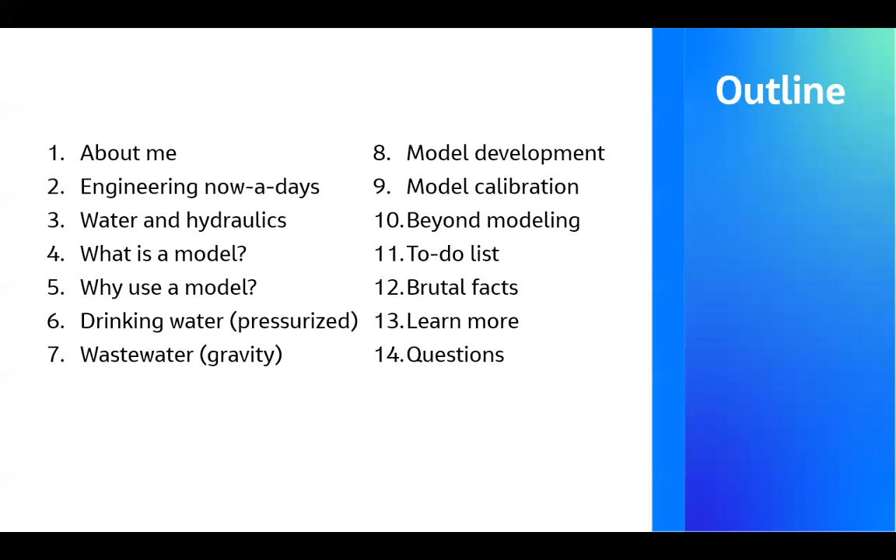Beyond modeling, some to-do list for you. You would want to develop yourself in hydraulics or even in some sub-realm of civil engineering. Some brutal facts about the consulting work, not to discourage you. As I said, we're always looking. Just some points to consider if you would like to apply to consulting work in the engineering profession, how you can learn more, some more resources for you, and hopefully we can have some time for questions.

So I'll do this. By training, I'm a civil engineer. Everybody's in civil engineering here, right? Yeah, yeah.

Good. From University of Tehran, where I was born and raised, and I worked for a few years. Then I moved to Canada in 2013. Before that, I did the master's from the same university. You can see the topic, energy assessment of pumping stations, how they should run throughout the day into a distribution system that brings drinking water from the treatment plant to the houses where we live. And then I looked at energy again between 2013 and 2018 at Queen's University.

It's not that bad, but I looked at energy efficiency, but not at the pump stations. I looked at each and every single pipe because that's where the energy is lost. And for that matter, I had to use a lot of statistical analysis. Well, that's my PhD. I looked at that. It's quite fun.

Then I became a professional engineer because toward the end of my PhD, I was working full-time in Toronto and part-time writing. Yes, that's a possibility, PhD students, if you're thinking about it. There's not only one way of living. You don't have to work full-time. If you're kind of through with your PhD, which was the case for me, I was lucky. I got the permission from my supervisor and I moved to Toronto, worked full-time, and part-time wrote my thesis. Getting a PhD, getting some professional experience. So right after one year, I got my P.Eng. with Professional Engineers Ontario.

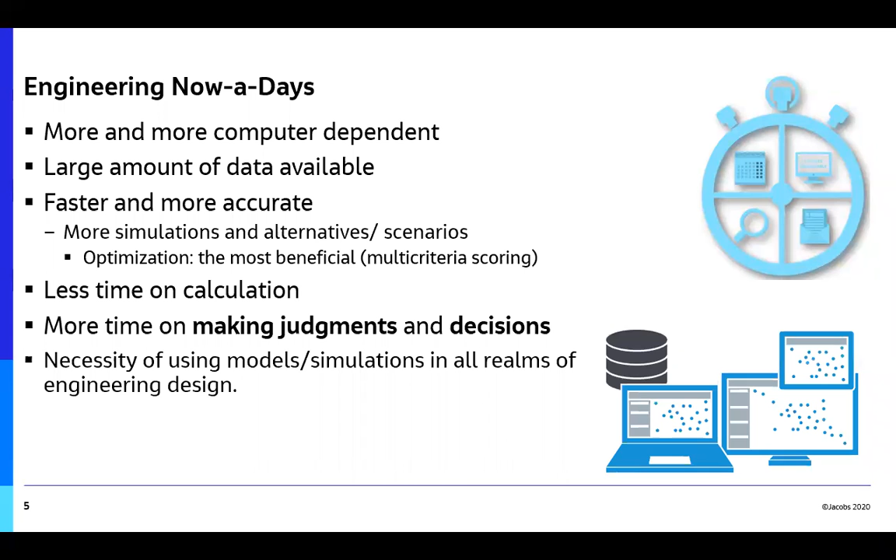So I think I already covered all the bullet points that I have in here. So today, water and hydraulics, a small part of civil engineering, as a big team, we're together looking at different realms of civil engineering. One is water. Under that, there's hydraulics, there's hydrology, and I'm not saying that the list is exhaustive here.

There are a lot of different niches that you're working on, and you might think my research topic isn't really included here. And you're right, because I'm just going to focus on hydraulics of conduits, not rivers and hydraulic structures. We use pipes between the water treatment plant and the houses to bring drinking water to the houses, and also pipes between the houses and the wastewater treatment plant that collect the sewage. So we're going to talk about those.

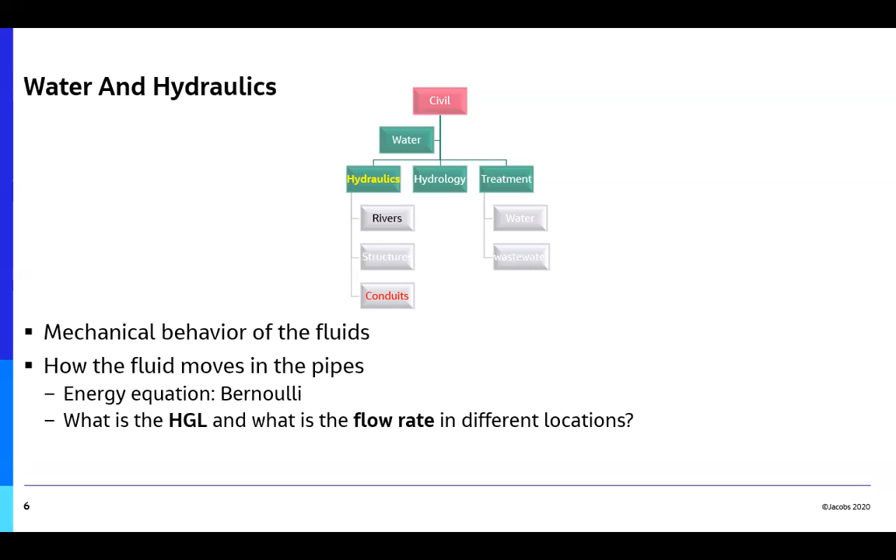Hydraulics is definitely way broader. When it comes to conduits, we're mainly interested to know the regime of the flow, or how the flow is changing in terms of flow rate, what is the HGL. These are the most important things. And in pressurized systems, it's likely different from gravity flows. Keep that in mind, and we're going to talk about it a little more.

As I want to just cover the basics, we all know what models are. Models could be like prototypes that we use in a lab, or the kind of model that I'm talking about would be virtual, in a computer.

Let's say if I did 2 theses in water distribution systems, I really didn't mess around with the real distributions. I didn't go out, dig out the asphalt and dig into a pipe to break it, to do tests on it to see how the energy is changing. Instead I used a model of the distribution system of, for example, the city of London, the city of Kingston, Ontario, or Columbus, Ohio, as I really worked. So have that in mind.

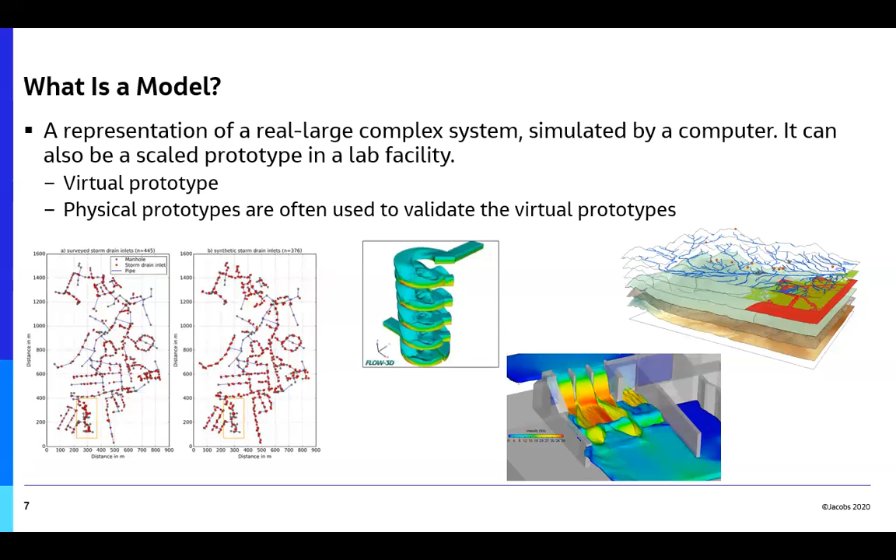And those models would represent the reality that we're trying to get to know how it would behave. I trust that every day you're modeling a bridge, a structure, a foundation of something, or a pipe, or whatever, your riverbed, like the little flume that you're modeling in the lab. We're always using models, and we want to look at what happens if.

That's why we use models. Basically, we want to say, we're not going to wait in the city of London 25 years and see what happens in 25 years when the population has grown to double.

We're going to look at the model. We're going to take the existing model of, for example, the distribution system of the city of London, and put the population of 25 years from now on it to run and see what kind of catastrophe we're looking at, so that we'll be ready in 25 years.

That's how we've always operated these systems. We look at what happens where there's a fire. Are we able to fight that fire? Is the distribution system able to fight it? What if there's going to be a lot of rain tomorrow? Are we going to get some sort of flood somewhere?

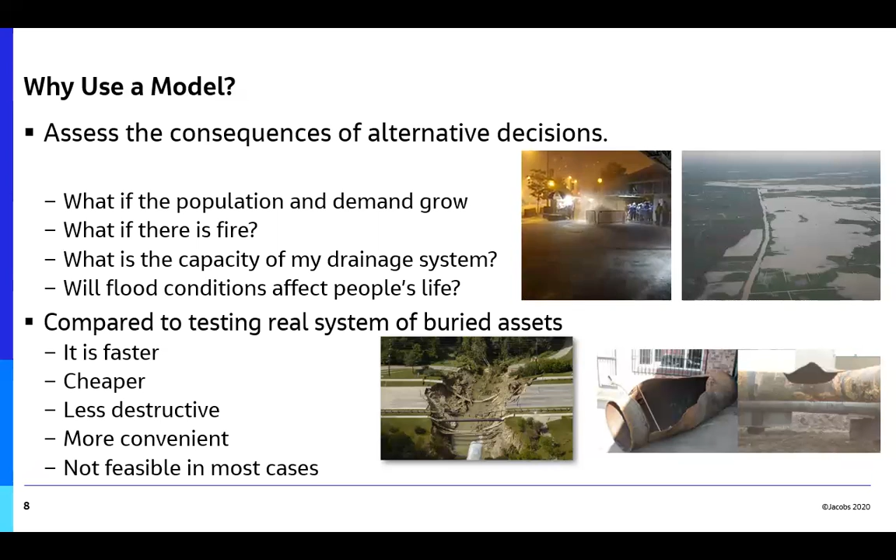Okay, so pressurized hydraulics - I'm going over the basics. It is interesting because sometimes graduates, even from major universities, come out and don't quite know the difference between gravity and pressurized hydraulics. That's fine, and that's why I talk about it for a minute.

So what happens is the HGL, hydraulic grade line, in a pressurized system - it's quite nice because when you're walking out on the street, say tomorrow or in two days we go for a walk, you're walking along the sidewalk. First of all, you've got to know that under the asphalt there are a lot of pipes. Some of them are bringing water to our houses.

Some of them are handling sewage or stormwater, gas pipelines, a lot of different things. We're talking about water and wastewater today. It's interesting for water - the HGL, you don't see it, but it's above your head. Why? It's out in the sky, usually two, three, four floors above your head, because these systems are pressurized.

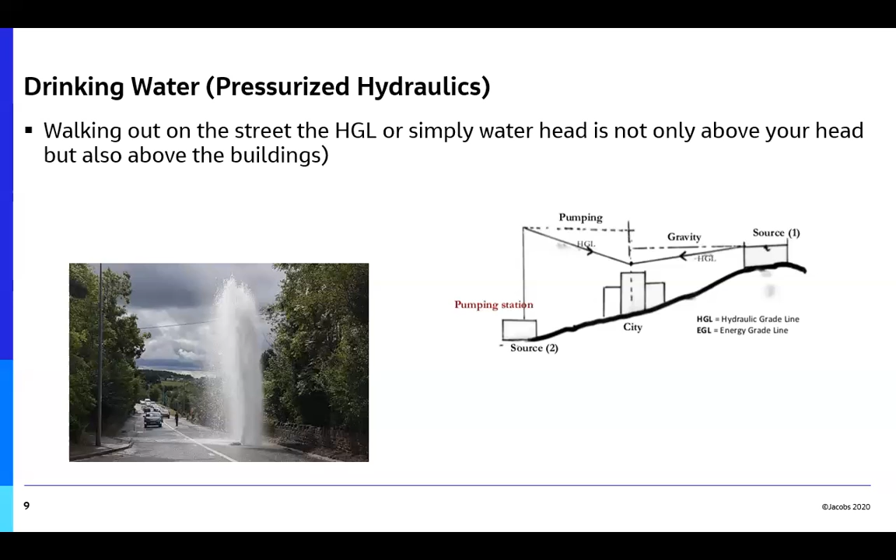When you open the water tap, the water needs to get out of the tap. So sometimes when there is a break in the pipe, if it surfaces at all, you can see how high it could go. So what is the difference? Okay, I was getting ahead of myself.

WaterGEMS by Bentley - some of these you have to pay for the license. As students, it's hard to get your hands on, and that's totally understandable. There are two ways. There's a surrogate software I'm going to talk about, EPANET. I wrote two theses with that

dinky software package. But there are sometimes opportunities through university - you can get a student license or something if there's enough of you asking for it. And I'm not saying if you don't have the experience we're not going to hire you at all, but it's going to give you an edge over people who don't know this software. If you're interested in something, at least you can try it, or watch some videos about WaterGEMS.

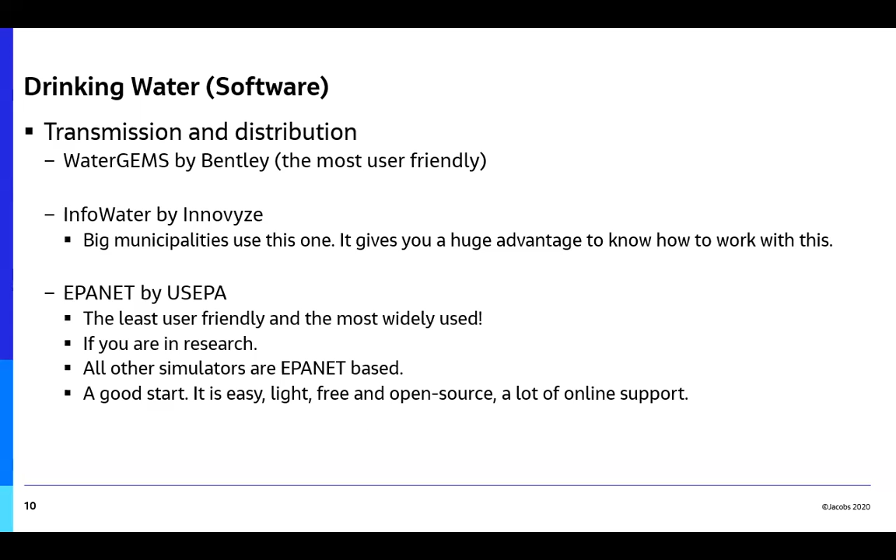And once you've familiarized yourself with those software packages, there is one more pressurized phenomenon you can look at. Have you ever heard of transients or water hammer? Maybe some of you are working on it as a research topic. Some people work on it. When there's a sudden change in a pressurized system, the system goes crazy.

It goes crazy, like ups and downs in the pressure. I'm going to explain it like this. There's a steady flow, like a normal regime of flow in a pipeline with a valve on it, going from left to right. And then I'm bored and I just shut the valve off. Sudden change in the system.

It happens - nobody does it on purpose, but sometimes in huge facilities like a pump station, or the operator - now these big facilities are all computers and sensors - sometimes things go wrong. The valve's closed, the water that a second ago was going from left to right is stuck. Think of a train as an example - it's just getting stuck. It just wants to keep going.

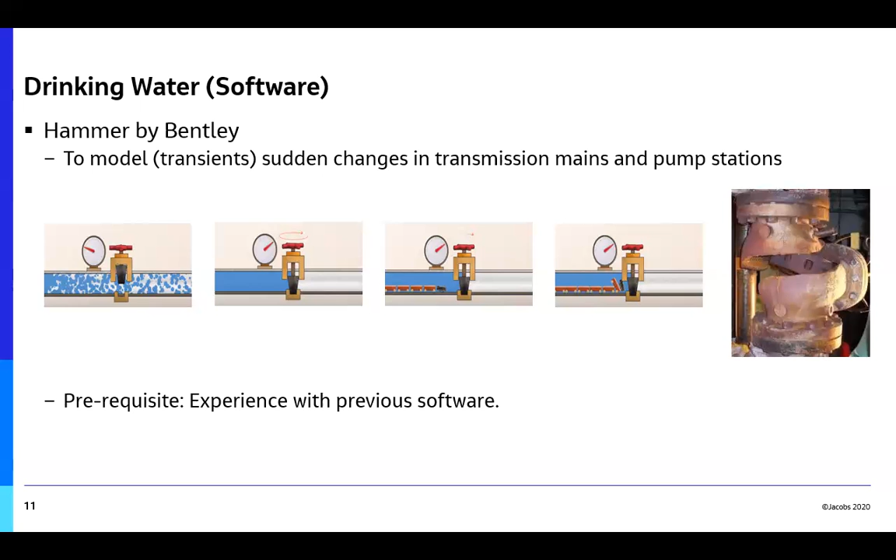So this is one of the coolest things you can do in pressurized systems. And once you do it a few times, you'll see it's not really rocket science, but it's a very sought after skill. So Hammer, which is the name of the software, is something you'd want to look at - by the software Bentley - but you want to have some previous experience in pressurized systems a little bit, and then you can probably experiment with transients.

By the way, transients is the way we engineers say it. If you open the dictionary, it's transient. But if you say that as engineers in the office, they're not going to... it's like two syllables, transient, which means a transitory state, something just like we started talking about. We say transients. Engineers are not necessarily very good at pronunciations.

But that's gravity flows. Unlike pressurized water systems, gravity flows - when you're out for a walk, you want to go for a walk today, I'm fine with it. Again, underneath there are sewer pipes. The wastewater, stormwater flowing through them. But the HGL is now underneath the asphalt, below your feet, because they're not pressurized. Those systems work by gravity. When the start of the pipe is higher, the end of the pipe is lower - that's how water travels.

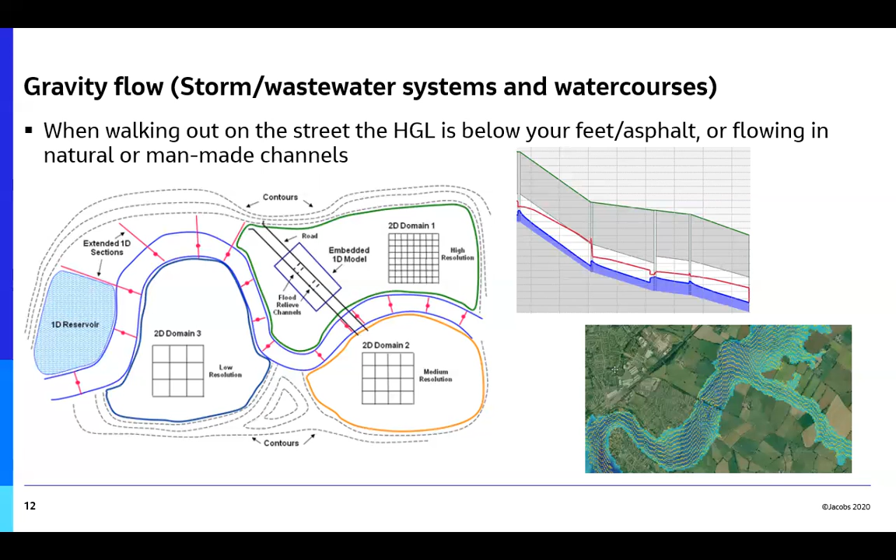Okay, software packages. Again, if you don't like my stories, you'll have access to the slides afterwards. I'll share with Professor Lee, and you can ask for those. InfoWorks by Innovyze, again, for big municipalities. If you know that, you're golden.

SWMM by US EPA, just like EPANET, is open source, used in academia. Try it now, it's just a few megabytes, you can experiment with it. That's your gateway. PC SWMM by CHI, used recently for medium-sized municipalities. SewerGEMS is just like the counterpart of WaterGEMS, CAD based.

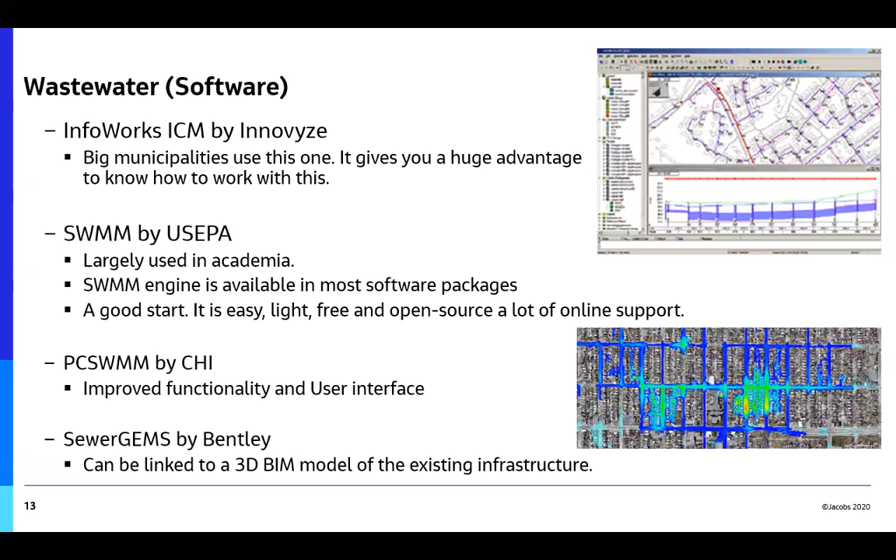How we develop models: we don't sit down and put all the elements together ourselves. Usually if there's not a model, a small municipality that wants to develop a model for the first time has a GIS system, they've put all their assets in GIS. So it stands to reason for you to get familiarized with ArcGIS or anything like that. If you can manage, I'm pretty sure you'll have access through university.

Once the elements are put together, the hydraulic loads are usually communicated to you through Excel spreadsheets from historical data, or every system is monitored through SCADA. What is SCADA? Supervisory Control and Data Acquisition. These pump stations, these big assets, are always being monitored, the flow going through them, the pressure they're putting into the system. That data is used, so we get it and put it into the model. Elements from GIS, loads from SCADA, or any sort of historical billing records - the model is shaped up.

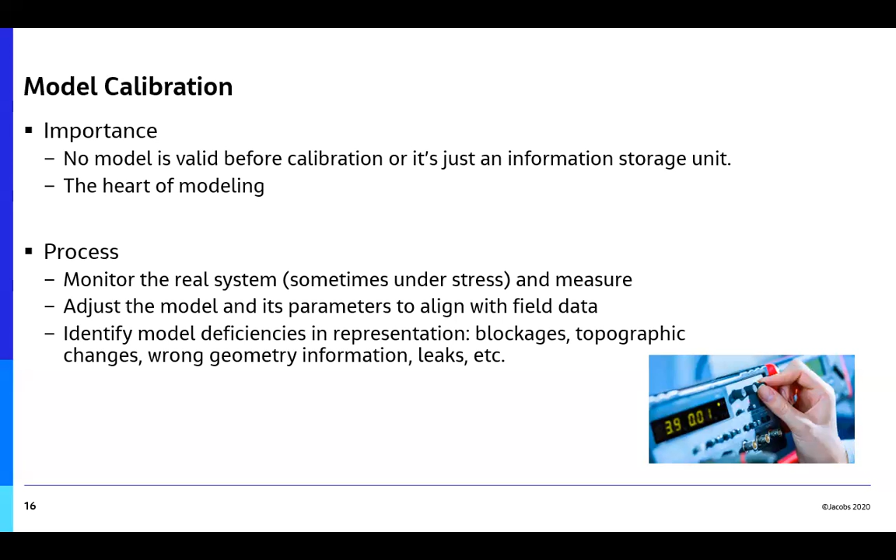And then, once the model is built, I'm afraid I have to say it's just a storage unit of information if you don't calibrate it, because there's no reason it has to show the exact behavior of the real system that's out there in the real world. What am I going to do then? We're going to monitor the system, and the process is monitoring the system and tweaking some parameters in the model to minimize the difference between the model and the field data. That is very crucial - that is called data or model calibration.

What's required? You go out in the field, some strategic locations, and you monitor the flows and pressures, then compare to the model - I'm not going to go through that, but that field data is very important. The quality of the data matters, because you're going to calibrate your model to the data. If your data is not of high quality, your model is supposed to represent reality, but it's not going to be of high quality.

It's a very sad fact, or it's reality, but it happens all the time - we're always limited because of some problem with the contractor, some mistake they made out on site when they were collecting their data. The calibration procedure will be compromised.

And usually when you're collecting your field data, here's the catch: you start monitoring. If it's a pressurized system like a distribution system, or a gravity system like a sanitary system, you start monitoring the flows or pressures. You scatter your monitors around the system and then you shock the system. In a water distribution system, what we do is open up the fire hydrants you've seen, and that creates a little shock, a pressure drop, and the monitors are monitoring the effect of that pressure drop. That's what you want during calibration.

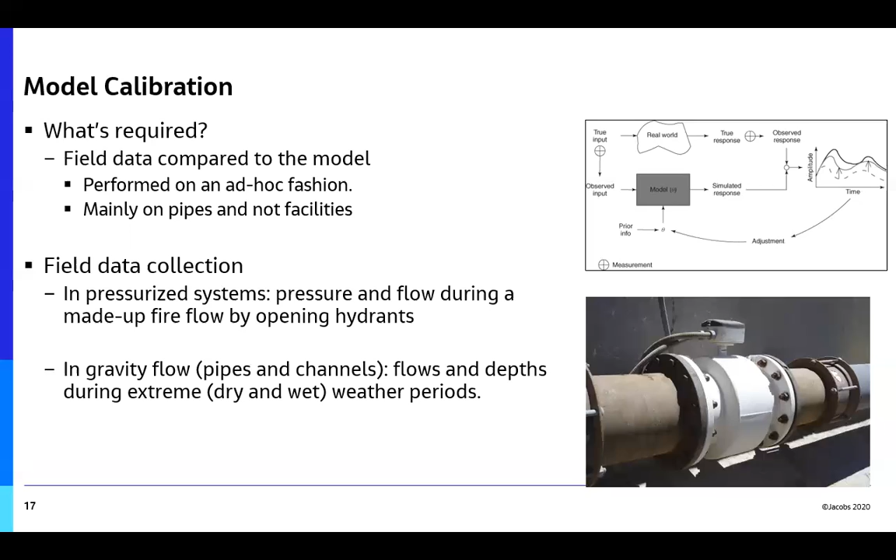Once you've done that - calibration is the heart of modeling to me. You usually start with smaller assignments; you don't delve into calibration right away because it could be overwhelming. But once you've calibrated a few models, great job, because you're perfecting your understanding of hydraulic modeling. And it's not just about hydraulics - any sort of model you're given, for structural analysis or geotechnical analysis, the same principle applies.

It's a good question to ask how this is actually representing the real system we're trying to figure out the behavior. There's a video of me talking about a real project we calibrated a year ago, sanitary work for the city of Clarence Rockland. It's one where we used optimization for calibration and machine learning. Quite interesting results.

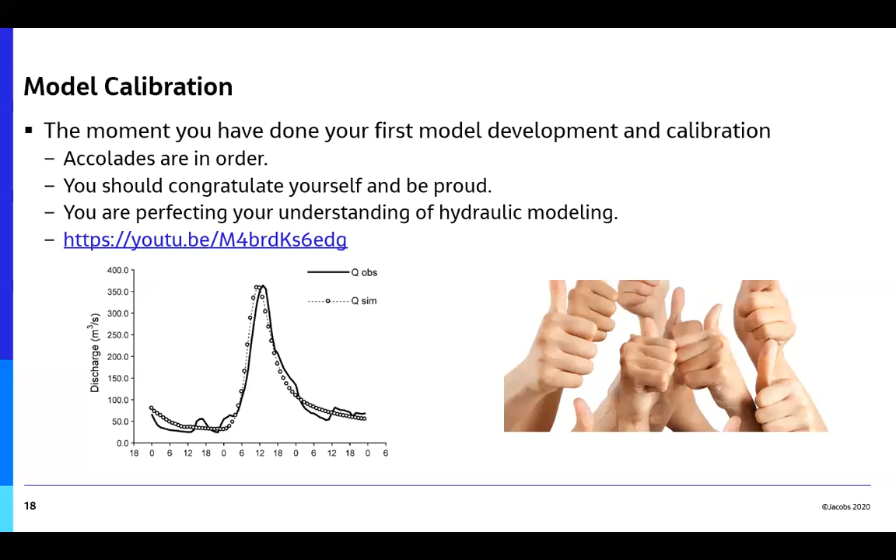I gave a lecture here almost a year ago for the teams, if you want to take a look at it. This is the simulated results, and this is the observed. You try to minimize the gap between those two, and that's how we get the models calibrated. You can never have a perfectly 100% calibrated model.

Sometimes we say this model is calibrated only for a 5-year rain event or a 10-year rain event. You cannot calibrate a model for everything. No model is completely calibrated to represent all the different extremes and situations.

I'm pretty sure you're going to have a lot of questions. I think we've covered a lot of these things here, so I need to go a little faster. After all, a lot of computation and calculation is done by the computer. You want to make sure you understand what's coming out of the computer, because you make the decision.

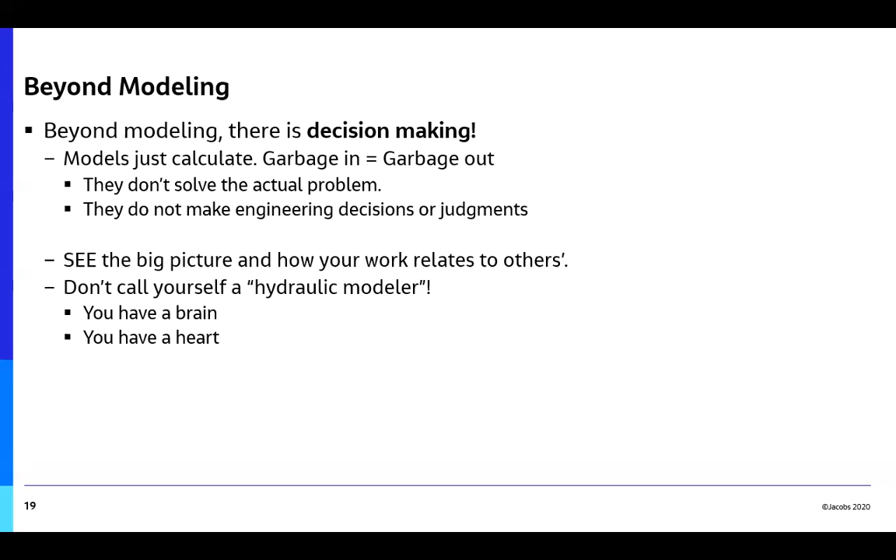The computer cannot think. Computer is not able to. There's a saying: all models are wrong until they're understood. If you don't understand what's coming out of the model, you should assume the model is wrong until you make sure you understand it. In industry, job ads say modelers, hydraulic modelers, structural modelers—but computers are not modelers. We're engineers. You have a brain, you have a heart. A computer can never do that.

Okay, beyond modeling, there's optimization. My whole academic life has been about optimization. Now I'm using it in sanitary systems.

This is a pump station, two pump stations that we optimize. All pumps running, some of them off and on, and then some running variable speed, some at full speed, and how we get the hydraulic performance of the system, how we fill the gaps and improve across different alternatives or situations we're looking at.

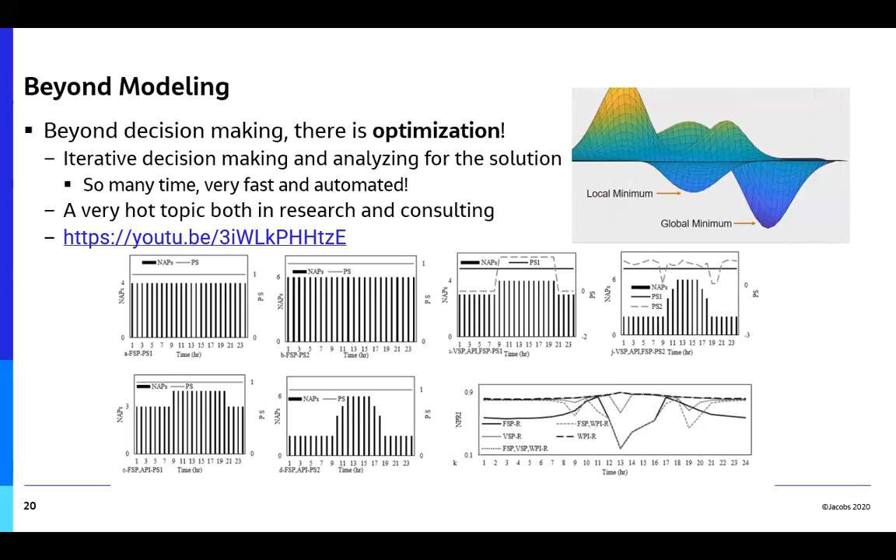There is a video in here I was going to talk about, but it seems like we're not going to make it, and it's after lunch. So if you're truly keen about it, you can watch that.

Also, beyond modeling, as I said, there's optimization, there's stochastic modeling. Here's another latest work of mine published in late 2021 in the Journal of Water Resources Management. Instead of saying, I'll put X1, X2, X3 into the model and I'll get Y1 or Y2, we say: what if X1 changes with this probability and X2 changes with this probability? What is the probability of Y1 being this value, or this value, or this value?

So instead of giving the decision maker or the operator one solution, you say there's a 50% chance this is going to happen, a 10% chance of that, so they can act a little more resiliently—is that a word, resilient? I don't know. But they can be prepared for different types of situations.

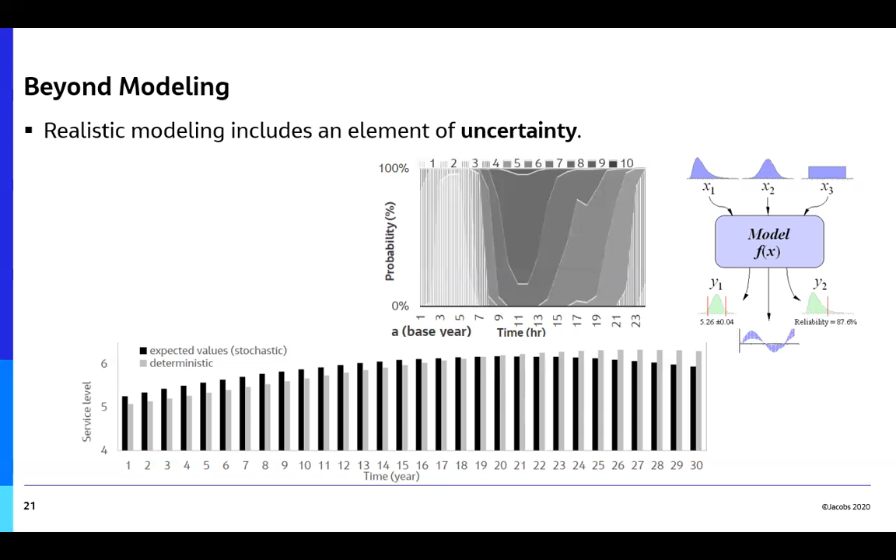Through those two YouTube videos—it's so weird when I look at myself on YouTube—you can listen to the lectures and how the results transpire, and also find the publications. Some brutal facts now.

After technical skills, we want you to be really organized because there's a lot of data that you're working with. You're going to, along with a team of other people, be accessing the same folders, files, and information. There are some ground rules, this is how we use the information. Just don't mess around with the files and whatnot.

Patience and good communication, because when you are the technical person in a project, everyone else - all other team members, the designer, the project manager, the client, project support - they think you know everything. Let's say a hydraulic model has a lot of information in it. You're the hydraulic modeling engineer, so you know everything about the hydraulics, and everybody's asking you questions, so you've got to be very good at communicating. That's one thing we really look at when we interview people, how they communicate.

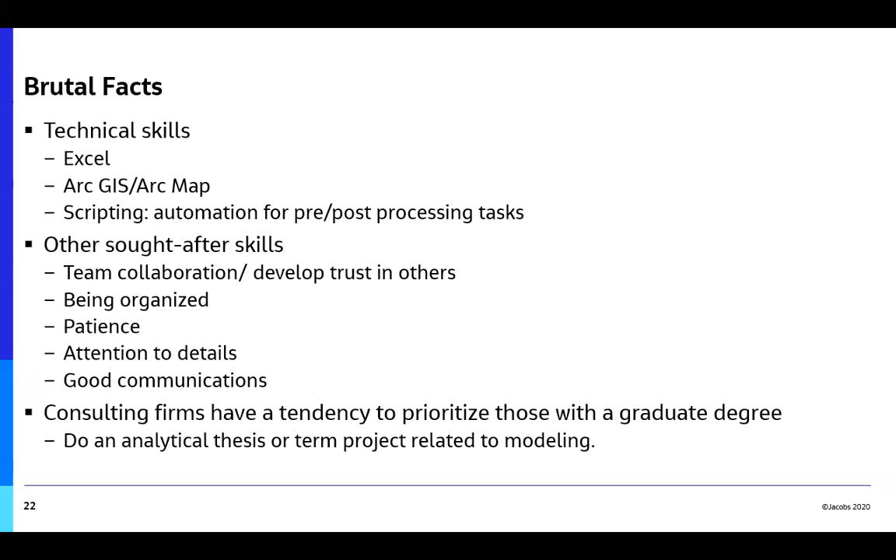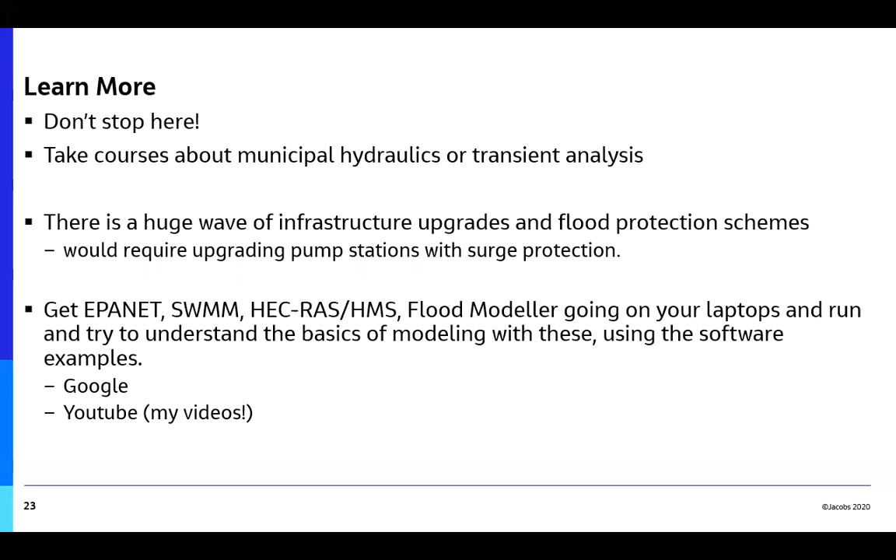Most of you have advanced degrees, so I wasn't going to include this since it's part of the slides I usually give to undergrads, but I'll provide you with some more resources if you want to learn about hydraulics and software packages. Obviously Google is your friend, and you can watch my YouTube videos if you want to see more of me talking about hydraulics, calibration, optimizing, SCADA, transients. Here are some resources for you to look at, since I don't have time to talk about everything in 45 minutes.